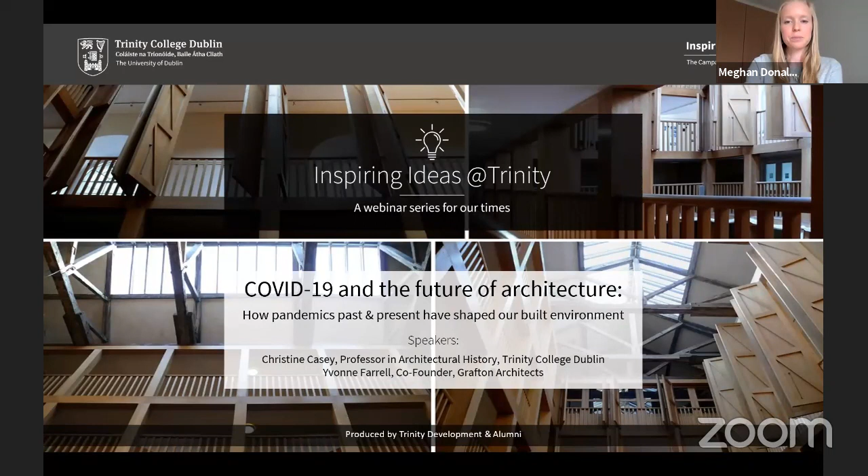Today, we're delighted to welcome Christine Casey, Professor in the History of Art and Architecture here at Trinity, and Yvonne Farrell, co-founder of the award-winning architecture firm Grafton Architects. They'll be looking at how pandemics have impacted on historic buildings and will share their vision for how our built landscape, from Trinity's own campus to Dublin's city centre and beyond, may change to adapt to the challenges posed by COVID-19.

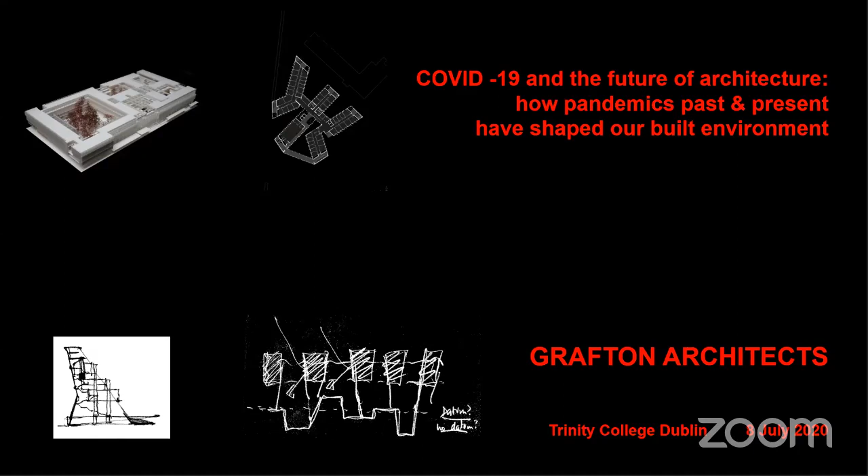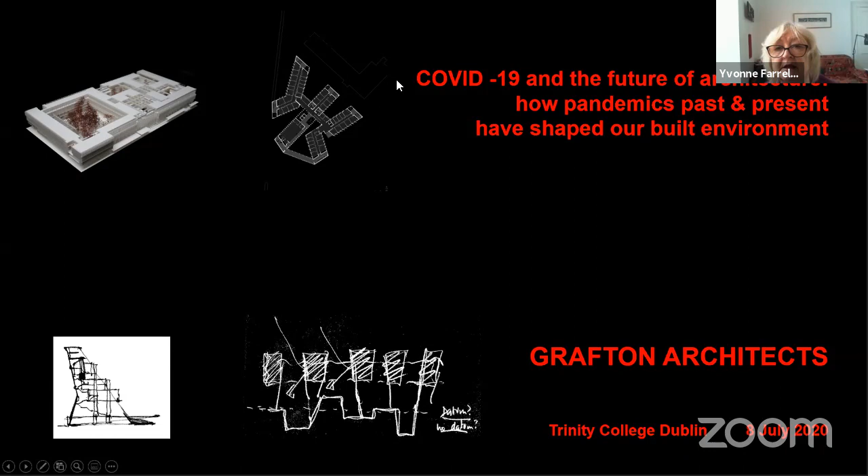What do I do? If you just press the forward button, Yvonne, or click on it, it should move. Yeah, no, I'm doing that. It's not stop share. No, I'm sharing, aren't I? Yes, you are. I'm pressing forward and back and nothing. Okay, so what do I do? Do I stop share or something? Okay, here we go. We have it.

Thank you. These are four plans, which I'll talk about in a minute, but I just want to start by saying that the future, the question about what we do in the future, we'd like to say that the future is a continuous present, and that it's also an issue of common sense about what lasts.

And the issue of dimension, we're all very aware of the 2 meters, or what 2 meters is. Just today, it's interesting that the World Health Organization have said they will study fresh evidence that airborne transmission of coronavirus, according to a group of international scientists, spreads far beyond 2 meters. They say that an infected person, when they exhale, expels droplets, but droplets under 5 micrometers in size can become suspended in the air for several hours and can travel up to tens of meters. This is what the scientists are saying, and the World Health Organization are going to look at this evidence in detail. What's interesting is that dimension and distance is something that, as architects, we deal with.

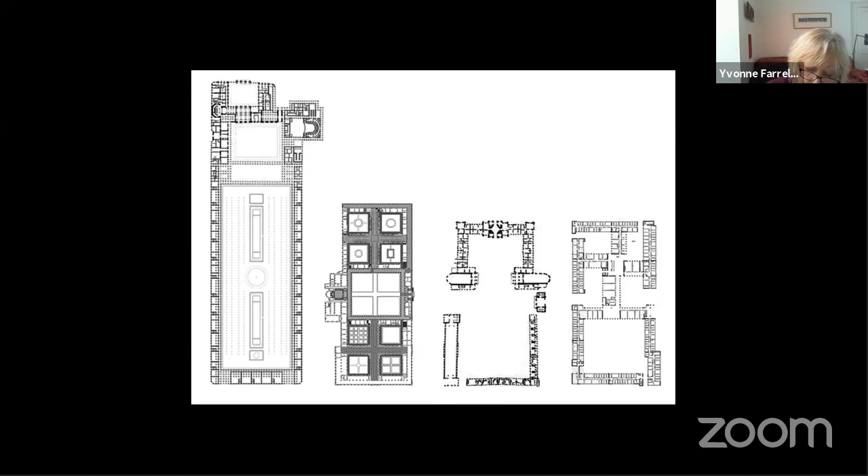This is roughly 200 meters from here to here. We were doing a competition for Saclay in Paris, and the site was 200 meters by 100 meters. We were looking at buildings. This wonderful building to the left-hand side of Trinity is Ospedale Maggiore, which was built in Milan in 1456 by the Duke of Milan, Francesco Sforza, built as a hospital for the poor. It stayed as a hospital until the 20th century, and now continues in use as a department of the University of Milan.

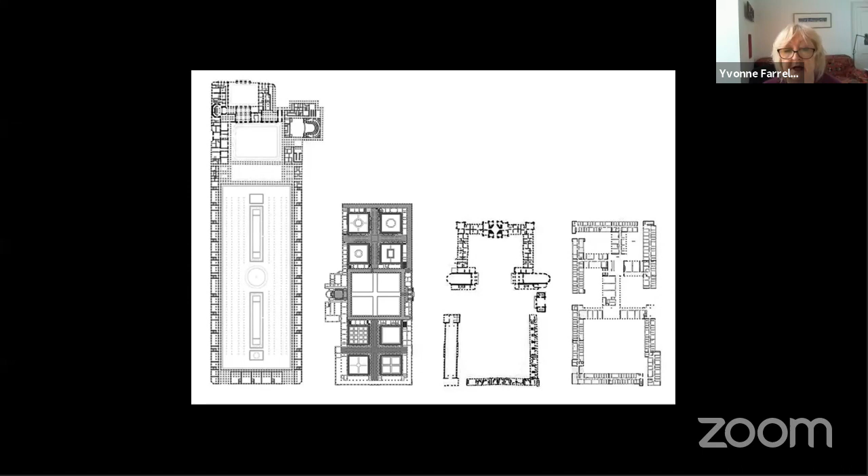What's amazing, though I can't go into it today, is to look at that building in detail, the level of dealing with fresh air, the items that Christine has referred to as well, fresh air and sunshine. If we move to the project in Saclay, what was really interesting is its distance from the center of Paris, on a plateau in Saclay. We were dealing with hundreds of offices, and part of the master plan was that 100 trees were to be incorporated into whatever the winning design would be.

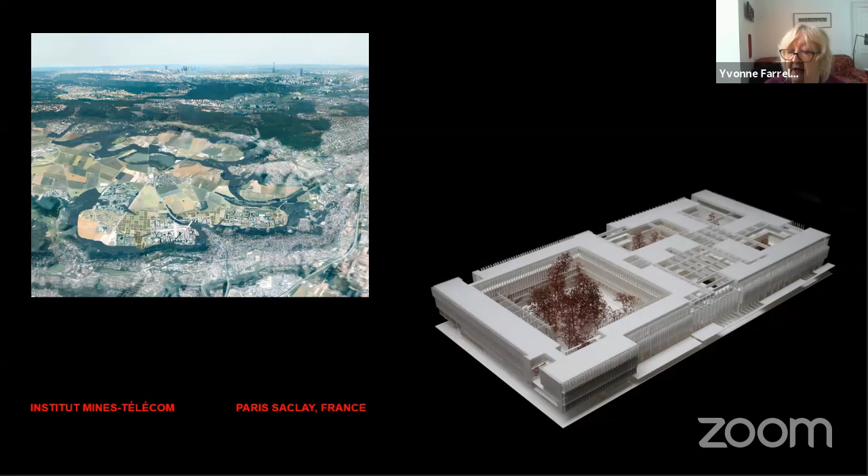Looking at these amazing courtyards historically, we worked our proposition that we had a series of courtyards around which the offices and research offices and spaces were organized. In terms of this plan, north is to the top of the page. You enter into the first courtyard, you view through into the larger one, which is the trees in real ground, and a series of other courtyards representing the seasons, pinwheeling around a central space from the entrance.

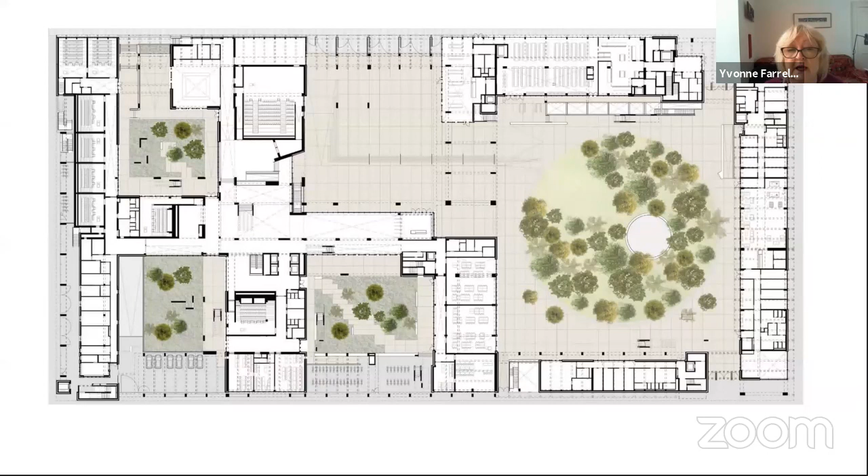For us, in terms of the section at the bottom of the drawing, you enter into the building, you move up an internal courtyard, which is top-lit, up various stairs or a ramp that brings you to a library, which is like a bridge position between the internal space and the courtyard formed by these natural trees, embedded in real ground below, where the car parking is, in the rest of the building.

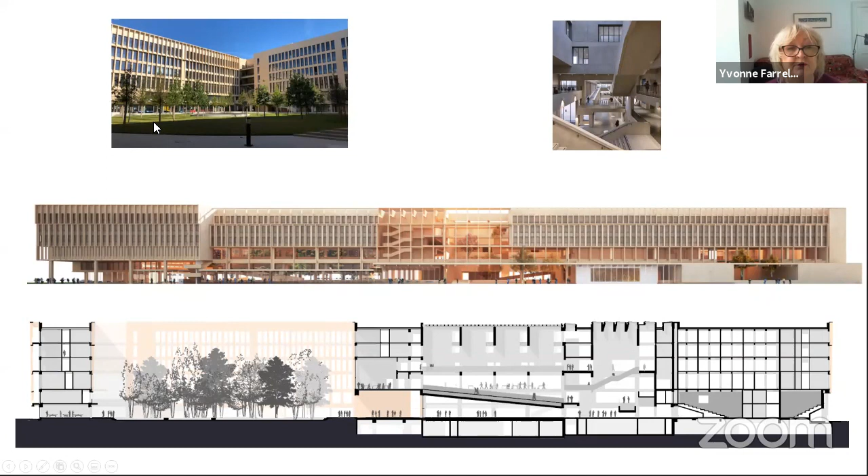And this image up here on the right, you're on the staircase in that space. You can see in the distance the ramp bringing you to the library and viewing out to the garden. And these trees, which are really an act of faith in the future, positioned in the central courtyard.

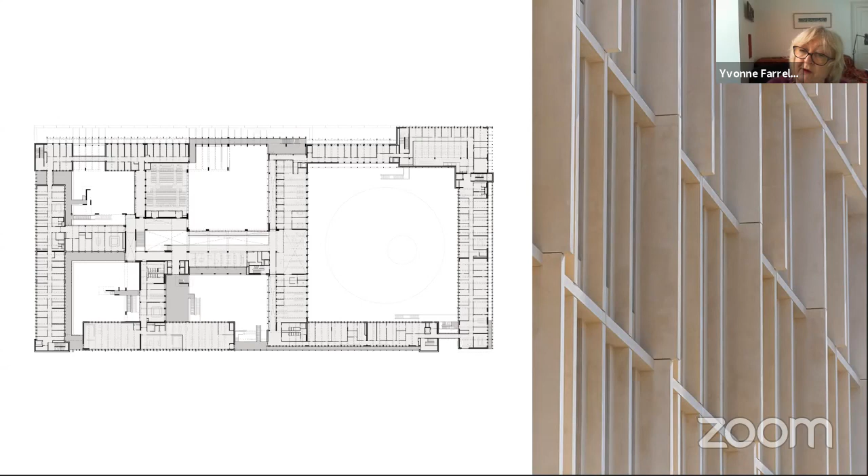This image for us is really important, going back to the points Christine made as well, that each of the offices, whether it's 3 windows or 2 windows, has a window either into a courtyard or out into the surrounding landscape, has tall ceilings, has natural ventilation. The thin plan allows both pleasure of light and relationship with nature. On the right-hand side, we have the deep wall, which screens from the sun and also allows connections both to courtyards and to outside.

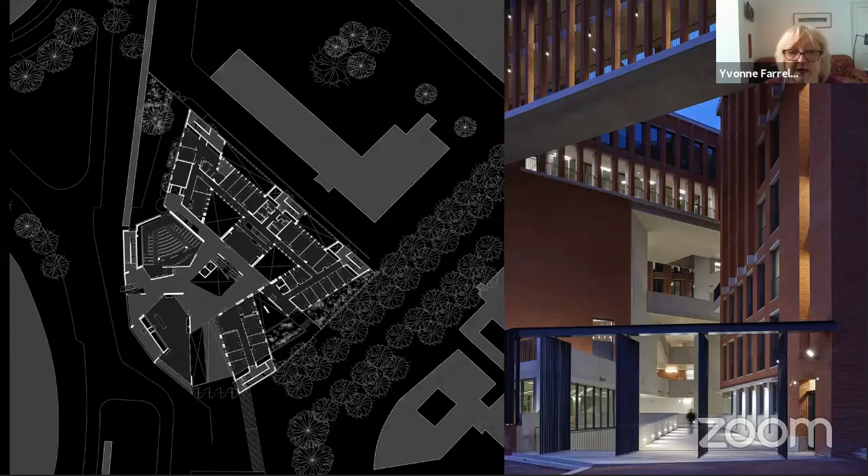In the plan on the left-hand side, you arrive from a space in the city and ramp up just over 600 millimeters into a central space, which is a 21st century courtyard. On the image on the right-hand side, you've ramped up into the space, and this area holds the community of scholars together, but also allows the breeze and ventilation coming in from the Canal de Brienne on the left-hand side to move up and be part of the community.

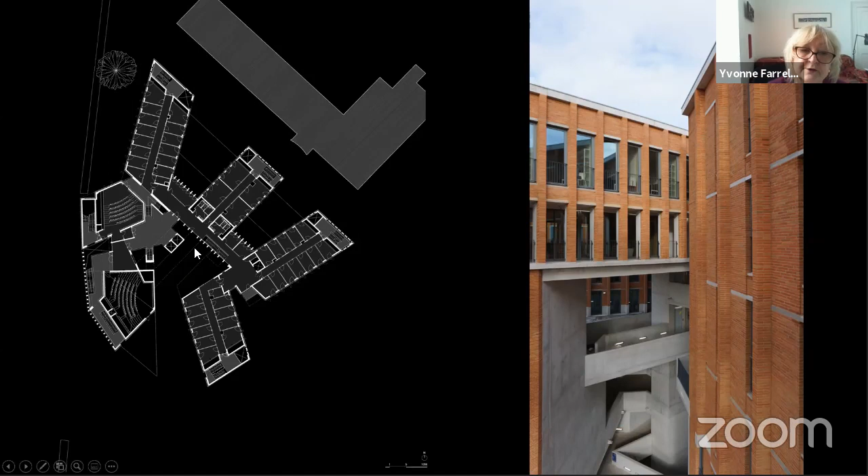So each of the research professors have their own offices, each with a view out to the extraordinary views and cultural heritage of the city of Toulouse, but they also cluster around this space, which allows natural air to move through the building.

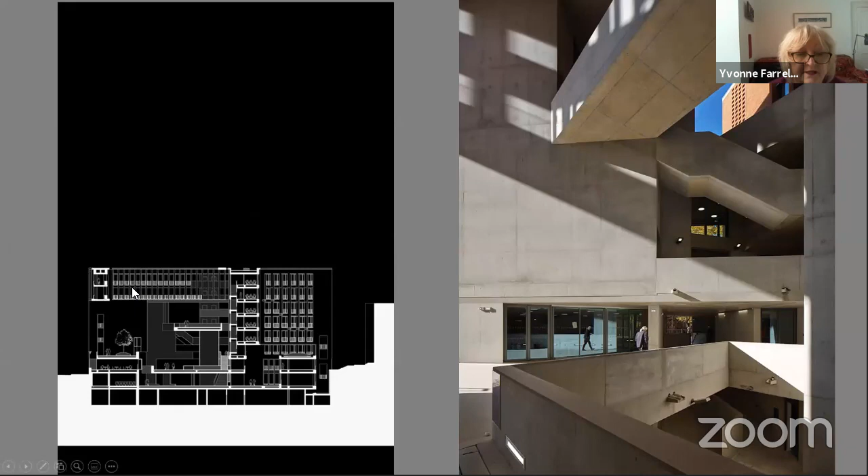Here you have that central space, this void with sky above, and the section showing the sky cloister, which frames the entrance and brings you through the building. This is the sky cloister, allowing external circulation to be part of the pleasure of this building. And here we have a view looking back out to the city, where the external connection and circulation frames the entrance.

So the point I'm making in terms of contemporary buildings is not about air conditioning, deep plans, narrow plan - each of these bars of offices are under 12 meters deep, which means you have cross ventilation and natural light.

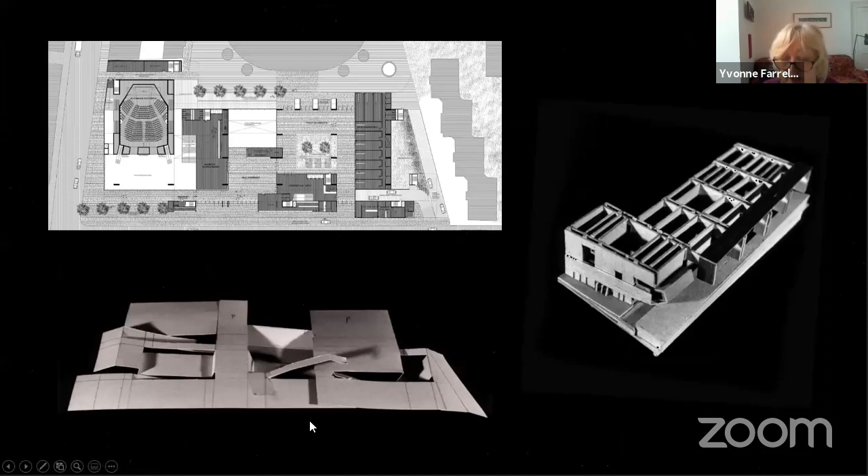Here we have a study model of the building showing the courtyards with the light, and then a section describing the courtyards between the offices, with natural light even coming into the big room for 1,000 people. You see it here in section, and also in terms of volume.

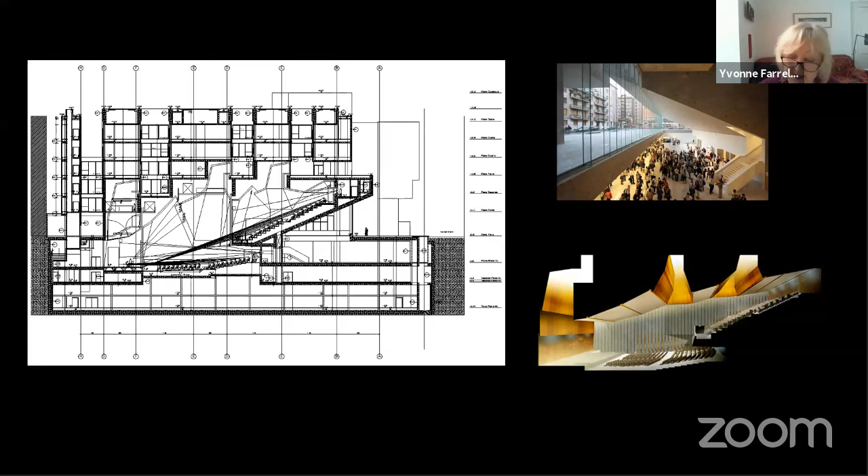Christine talked about scale, large scale, and air and ventilation in her historic description of architecture - it's interesting moving down to this next project.

This is a project we built in Lima, Peru. Lima is a desert city, 12 degrees down from the equator, and should be unbelievably hot, but because of a current coming from Antarctica, the temperature is affected and roughly in the 20s Celsius. When we were doing this competition, we asked: if you have a place where the temperature is normally static around 20s, does that affect architecture?

And we questioned and questioned the brief and interrogated and separated out the rooms that needed to be inside from other things that could be exterior.

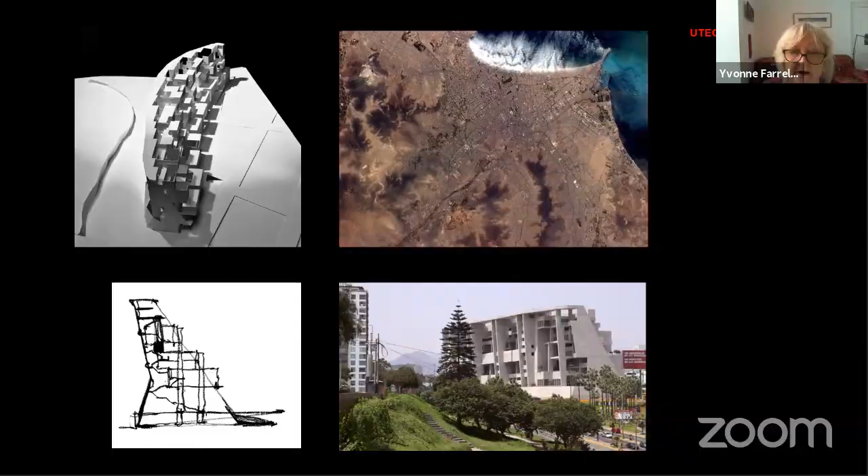And this image describes the circulation. What we did was make a vertical campus where students would always circulate on the outside, where they'd have the pleasure of seeing what other departments are doing by being able to see in, but also we wove landscape into this matrix of circulation.

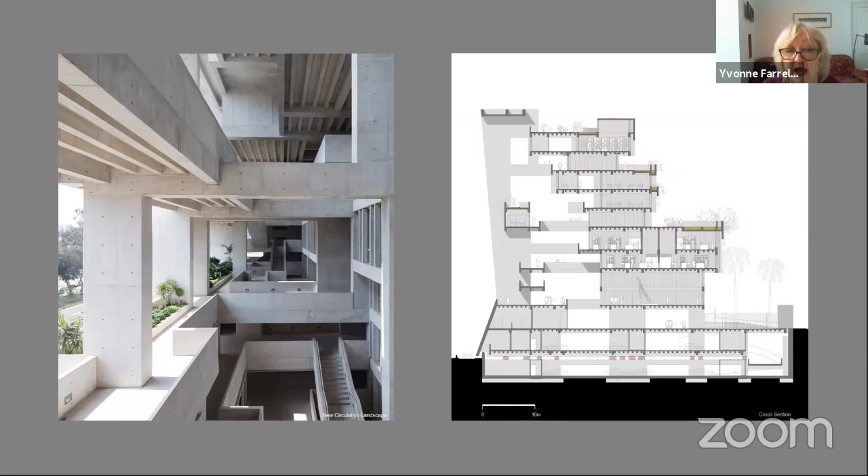And it means the breeze from the ocean actually participates in this carved mountain. I'd like to talk about the impact of COVID. It confined us to home, it's asked us to readjust our lives, and now it's a real chance to rethink how we live.

And it was referred to in the beginning of the introduction. In 2018, Shelley McNamara and I were curators of the Venice Biennale, and we invited about 100 architects from around the world to present their work to the general public. Today I'd like to remind ourselves of two particular projects: one is a school and the other is housing.

There's no time today to do it, but if you have time, go onto YouTube and look at this kindergarten in Tokyo by Tezuka Architects—it's absolutely wonderful. It's an oval in plan, playful but deadly serious. It integrates landscape, and just have a look at the YouTube of children playing and jumping and the continuous running because it's an oval.